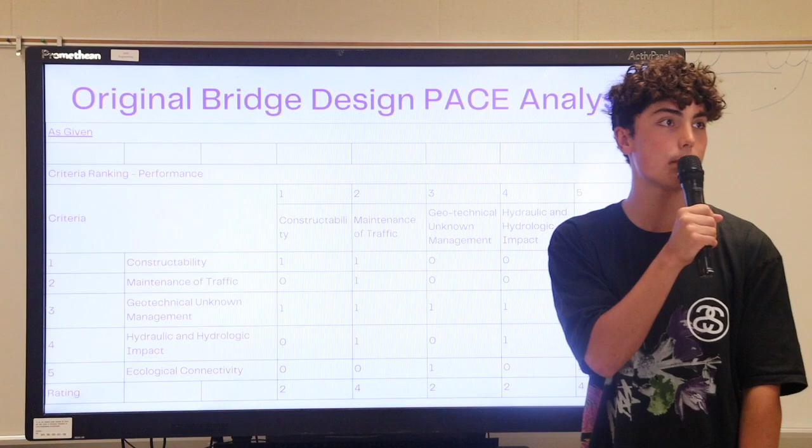So hello, my name is Evan Zimmerman, and I'm going to be going over some of the ratings that we did. For your original bridge design, we gave it: constructability a rating of 2, maintenance of traffic a rating of 4, geotechnical unknown management a rating of 2, hydraulic and hydrologic impact a rating of 2, and ecological connectivity a rating of 4.

Endangered species impact, we gave a rating of 3. Wetland impacts was a rating of 2. Spirit of place was a rating of 1. Public perception was a rating of 4. And our construction completion date is a rating of 5. This is for y'all's original design.

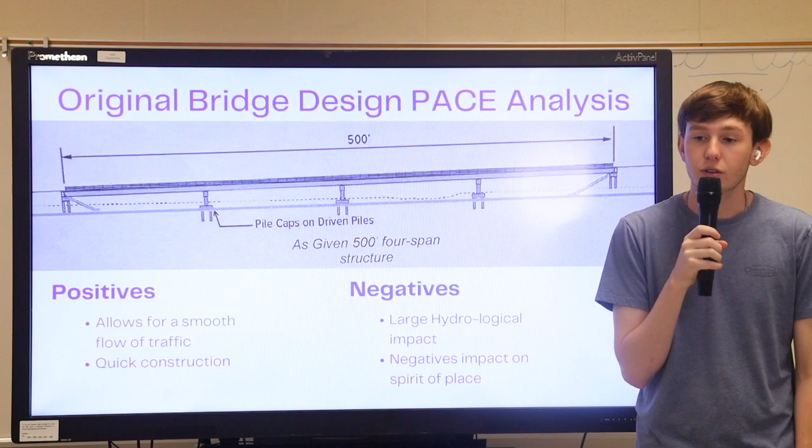Here's a picture. It allowed for a smooth flow of traffic, quick construction, but it had large hydrological impact and negative impacts on spirit of place.

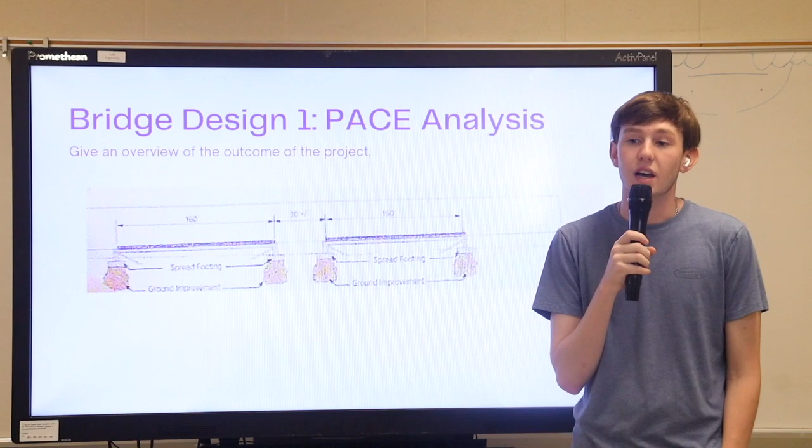Bridge design 1. We went through this one and gave our own ratings on how we thought that it would affect things. Constructability, a rating of 3. Maintenance of traffic, also a rating of 3. Geotechnical unknown management, a rating of 3. Hydraulic and hydrologic impact, a rating of 3. And ecological connectivity, a rating of 2.

Endangered species impact got a rating of 4. Wetland impact, a rating of 5. Spirit of place, a rating of 1. Public perception, a rating of 2. And construction completion date is a rating of 2 as well.

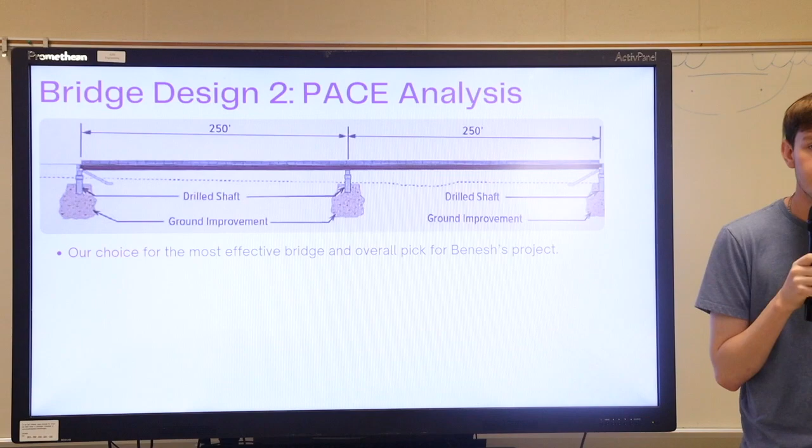We chose bridge design 2, and this is the rating that we gave it. We gave it a constructability of 3, a maintenance of traffic of 3, a geotechnical unknown management of 3, hydraulic and hydrologic impact of 4, and an ecological connectivity of 2.

Endangered species impact was a rating of 3, wetland impact is a rating of 3, spirit of place is a rating of 2, public perception had a rating of 3, and construction completion date was a rating of 3, which is the highest bridge that we went through.

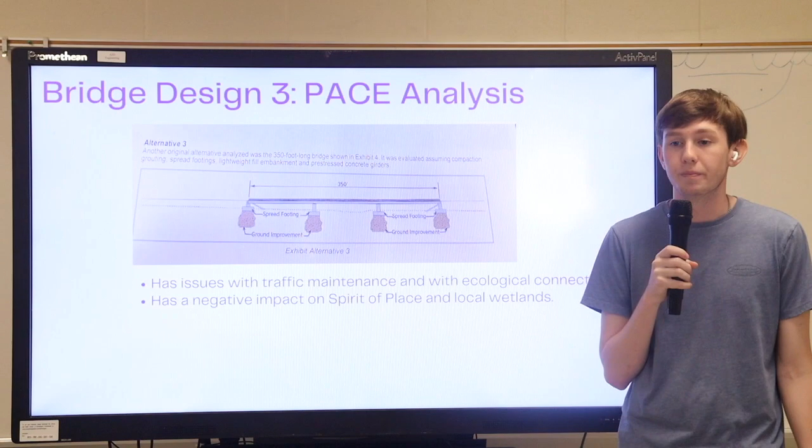The rating that we gave this one: constructability, a rating of 3. Maintenance of traffic, a rating of 2. Geotechnical unknown management, a rating of 4. Hydraulic and hydrologic impact, a rating of 3. And ecological connectivity of 2.

Endangered species impact had a rating of 3. Wetland impact had a rating of 2. Spirit of place had a rating of 2. Public perception had a rating of 5. And construction completion date had a rating of 4.

There we go. And our alternate 4 bridge lengths and configuration, at a constructability rating of 4, a maintenance of traffic of 3, a geotechnical unknown management of 2, a hydrologic impact of 4, and an ecological connectivity of 2.

Endangered species impact had a rating of 3. Wetland impact had a rating of 3. Spirit of place had a rating of 3. Public perception had a rating of 3. And construction completion date rating of 4.

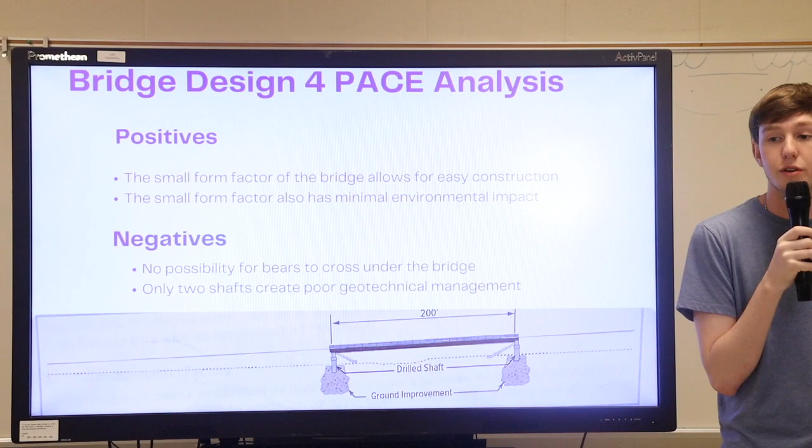And here's the analysis for Bridge 4. There was a lot of positives and negatives. This was the second bridge we would have chosen if we didn't go with 2. The small form factor of the bridge allowed for easy constructability, and the small form factor also has minimal environmental impact. But there was no possibility for bears to cross under the bridge, and only 2 shafts create poor geotechnical management.

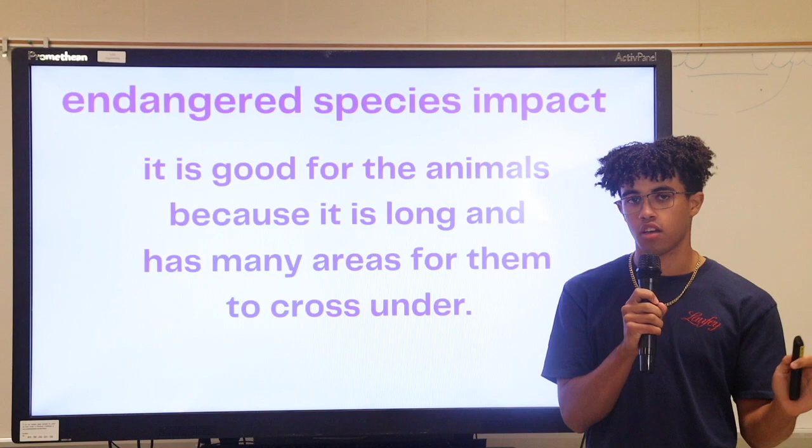Hey, I'm Johnny Reed. We're going to talk about the individual aspects of our presentation. So for endangered species impact, we need to make sure it's going to be good for the animals to cross under each bridge, so having more separation pylons is going to make it easier for them to get through. As for the wetland impacts, since there's only 3 pillars, the wetland will be preserved more because there's going to be more structural stability for the water to pass through.

As for the spirit of place, working with Raymond Jackson Howard, we've been able to find an effective solution that isn't going to cause such a large bridge. But because we have that 500-foot bridge, it is going to have a negative impact on spirit of place. It's okay because this, coupled with our public perception, since the bridge is very industrial looking but also going to be very environmentally friendly in terms of its presentation, is going to counteract that spirit of place. The completion date is a factor we have to consider because it's going to take a longer period of time to complete this project due to the larger bridge design.

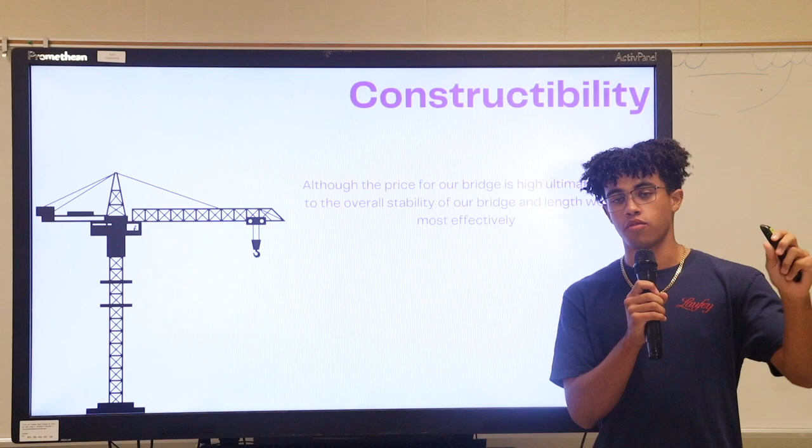But ultimately, due to the constructibility, we can take that risk, because although the price of the bridge is ultimately very high, and due to the length of the bridge it's going to take a longer period of time for us to get through. But due to the final product, we believe it's going to be worth it to go through this process.

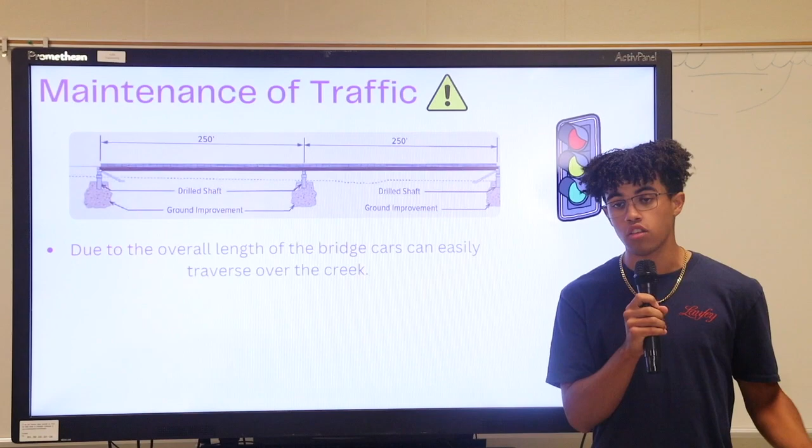As for maintenance of traffic, as the Department of Transportation, we believe it's going to be very effective as well, not only for the animals who cross under our bridge, but for our cars who have to traverse over the bridge.

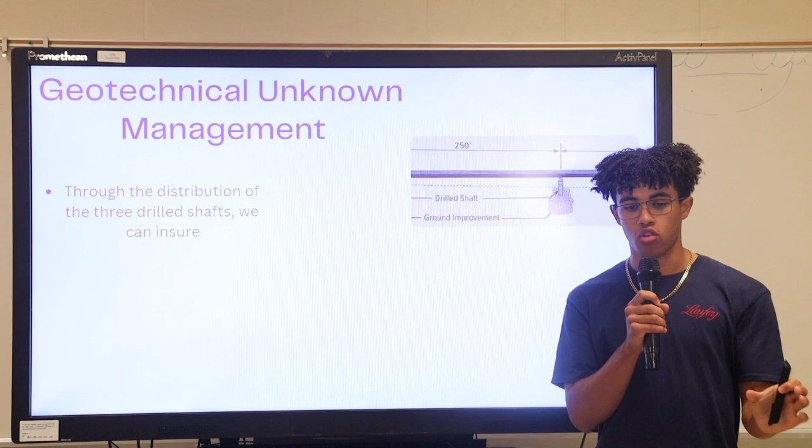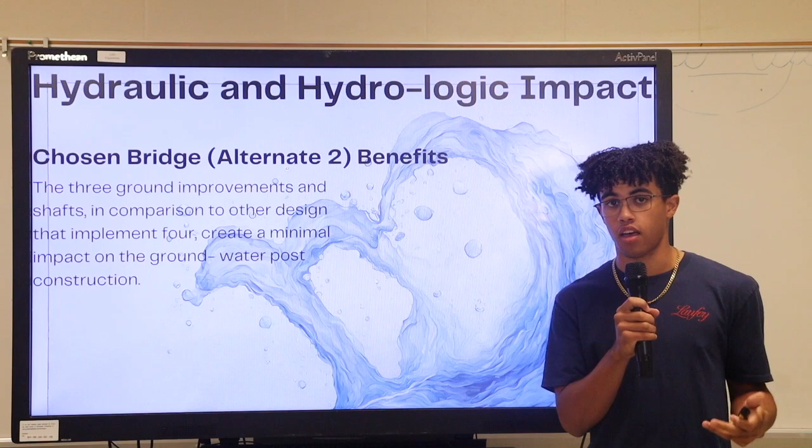As for our geotechnical unknown management, due to more drilled shafts, we're going to have more structural stability in terms of ground relation, which is great for our project. As for hydraulic and hydrological impact, our chosen bridge number 2 is ultimately the best in our eyes because we can keep the best comparison between that geotechnical impact as well as our hydraulic impact, which will keep an efficient way for our water to transport through the creek, which will also help with that spirit of place because, as we know, the wetlands are very important to the Native American people.

As for ecologic connectivity, our chosen bridge, although very long, is going to allow more animals to pass through, and whether it being suspended over the ground, we're not going to have the perception of the animals passing through negatively impact their day-to-day lives.

So ultimately, Bridge 2 is the best for those couple of reasons. Having a bridge that is not only structurally sound, but also positive for our wildlife and for people who reside in that place before Americans came, we're going to make sure that we A, have an efficient bridge, B, overall don't disrupt the spirit of the land to an unhealthy extent, and longevity, this bridge is going to be around for generations to come, and we're not going to have any negative impacts coinciding with it.